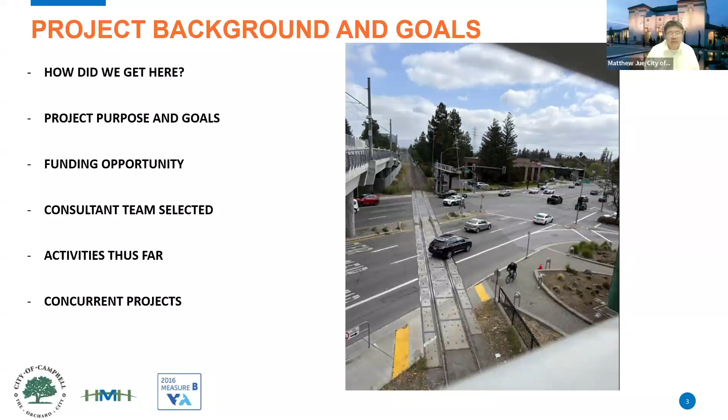So with that, we will hand things over to HMH, who will share their findings thus far. Thank you, Matthew. Hi, I am Jon Cacciotti, a principal with HMH Engineers, and I have been leading the consultant effort studying alternatives for the project footprint and configuration.

The project is located at Hamilton Avenue and State Route 17. The yellow circle there is the limits of the study area. As Matthew mentioned, there's a broader corridor that will have some additional information at the end of the study, reaching from Bascom Avenue to the east of the screen here. But again, our project is focused at the interchange, crossing the high stress movements with Caltrans and the state highway system. Also nearby is the old Fry's Electronics building in the southwest quadrant of the project area, and the VTA light rail station in the southeast quadrant.

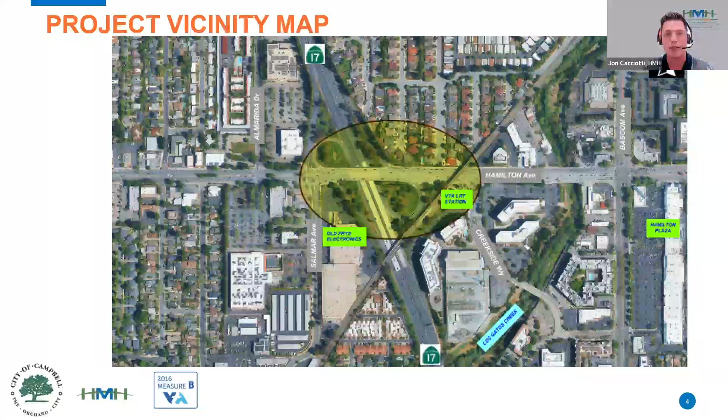Existing conditions out there are outdated and do not meet current best practices for multimodal accommodations, including bicycle and pedestrian stress levels. The project is seeking to improve these existing conditions by reconfiguring the interchange and potentially realigning the bicycle and pedestrian route through the project area to improve pedestrian comfort and lower stress levels for all ages and abilities across the project corridor. As you can see, existing conditions have yield-control crossings at our on and off ramps, or at the loop on-ramp specifically, which can be very stressful as a pedestrian tries to navigate whether or not a vehicle will yield as they use those crosswalks. Similarly, crosswalks are narrow and in some cases outdated or inconsistent in their definition through the corridor.

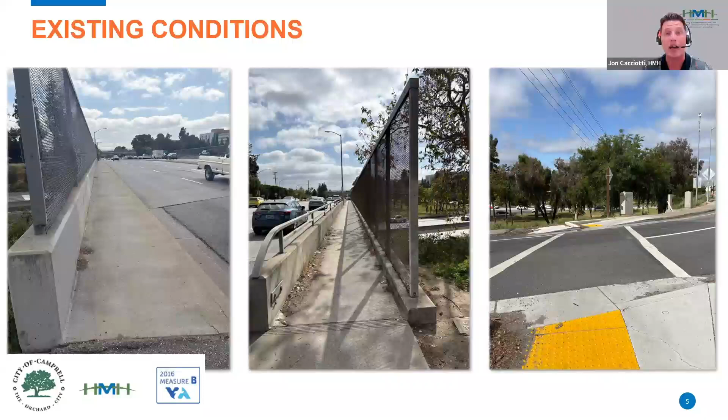I'd like to recap some activities that have occurred over the life of the project, including engagement with the public and other stakeholders. Earlier this year, we engaged in a community survey, of which we received over 400 responses, and we held a similar in-person public outreach meeting to describe the project. At that time, no alternatives were developed, and we were working with a blank canvas, trying to identify how the community and local residents would like to see a solution and how they would prioritize the trade-offs of these treatments. One thing we really sought out was various experience levels of our bicycle and pedestrian users, those that may be confident and use roadway facilities, as well as those that may be inexperienced or uncomfortable on the existing facilities. We also sought input from residents throughout the city and neighboring communities to ensure that we have a good representation.

On the right, there is a bar graph of the prioritizations that we sought from the public. The question we asked was, what aspects of a bicycle and pedestrian facility do you consider most important? Those were ranked on a scale of 0 to 10, 10 being the most important.

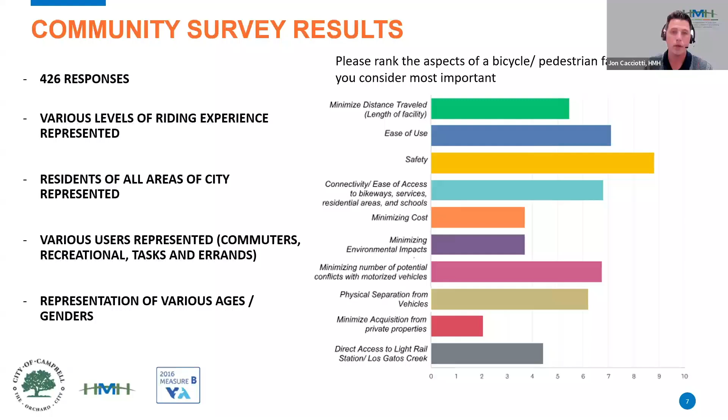We also engaged our stakeholder partners, including the City of Campbell's Bicycle and Pedestrian Advisory Committee, VTA, Caltrans, and the City of San Jose. We presented the alternatives for viability, fatal flaws, any issues that they may have, as well as compatibility with other ongoing projects, either in the City of Campbell or elsewhere through the City of San Jose and the region. Each of the project partners here has reviewed our project plans and has demonstrated concurrence with and support for the project as a whole.

For the alternatives developed, we evaluated them on a number of metrics, similar to what was described in the stakeholder outreach and the survey performed earlier this year. Key areas that were evaluated were the user experience - how does it feel to be on this facility, including number of conflict points, how separated you are from vehicles, and the delay associated with signalized crossings of different movements for bicycles and pedestrians.

We looked at impacts to traffic operations, ensuring that our project alternatives, if they do have an impact to traffic operations, which are heavily congested in this corridor, that we understand those trade-offs. Environmental, both visual and biology - potential impact to trees or native species, and the impacts of our project alternative.

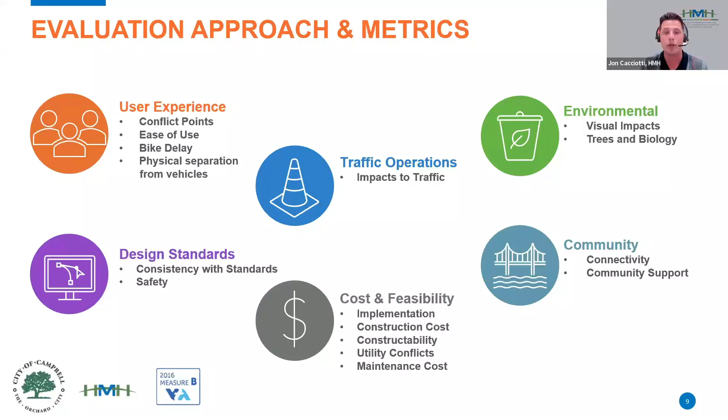I'm going to briefly introduce each of the 4 alternatives that were studied, as well as some major pros and cons that help to elevate - either increase or decrease - how these alternatives were scored as we looked at them in comparison to each other.

The first route is the southern route. In this exhibit, State Route 17 is running top to bottom on your screen, and Hamilton Avenue is running left to right. North is up.

In this alternative, bicycles and pedestrians would be routed off of Hamilton Avenue to the south, along roughly 500 feet south of Hamilton Avenue, over both the southbound diagonal on-ramp from Hamilton to State Route 17, as well as the highway itself over State Route 17.

The alignment would then tuck into a landscaped area between the northbound loop on-ramp and the VTA light rail retaining wall that runs diagonal through the project screen. The alternative would continue to the east and cross under the existing light rail structure at grade, in roughly the same location as the existing sidewalk.

The project would terminate on both the east and west intersections as shown here, with upgraded facilities at those intersections to facilitate bicycle and pedestrian ingress/egress. In the westbound direction, we would also add a bike lane that is not present currently and enhance it with green striping and other markings to delineate that facility for use by westbound cyclists who did not want to use the Class 1 grade-separated facility to the south.

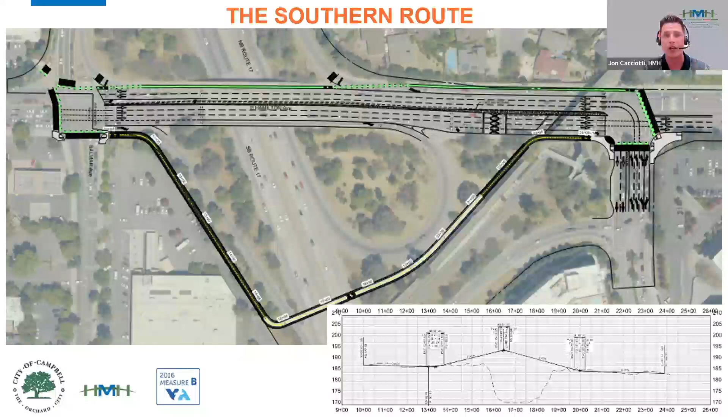Major pros of this alternative is that it reduces some of that out of direction travel that we talked about with the southern route. It is the most direct, particularly with a convenient staircase in the loop for pedestrians, but it does have some drawbacks. It does have a more significant vertical change in profile as opposed to the southern route, and most notably, it retains an at-grade crossing of the southbound diagonal on-ramp.

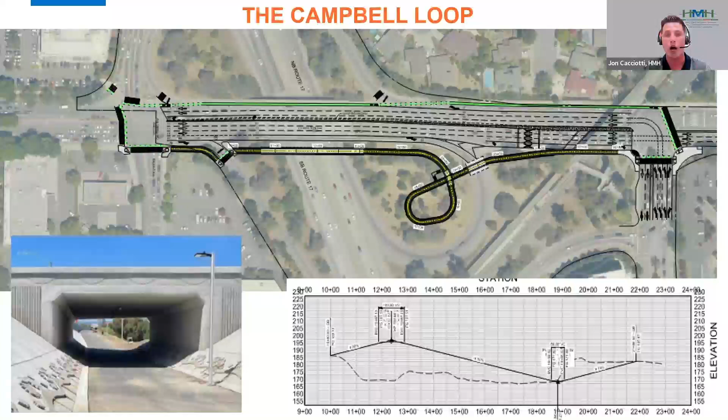An image of the undercrossing is shown in the bottom left corner of the screen. This is an example of what that crossing underneath the northbound loop on-ramp could look like, opening up that structure so that it has passage of light and air and the appearance of a safe facility that you can see through and understand the obstacles you may be navigating on a bike or as a pedestrian.

The third alternative is the straight shot. It would again remain on the south side of Hamilton Avenue. This alternative would have at-grade crossings from left to right at the southbound diagonal on-ramp. There would be a new structure over State Route 17, similar to the alternative I just described. Then instead of looping within the loop on the northbound loop on-ramp, it would cross at grade across the northbound loop on-ramp and then continue at grade on the south side of Hamilton Avenue.

Major pros of this alternative is it has fewer structures than other peers, and in that regard, it is more cost effective, but it does retain at-grade crossings of both loop ramps, which can introduce conflicts and stress levels for those all ages and abilities riders that we are trying to accommodate. Similar to each of the alternatives described so far, enhanced bike facilities would be added in the westbound direction of Hamilton Avenue and intersection improvements as shown previously.

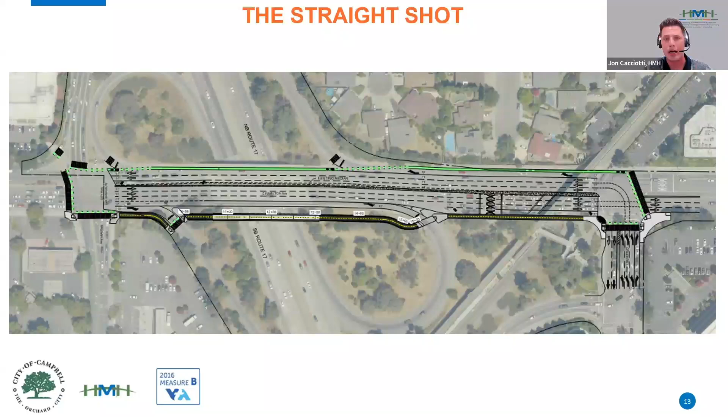Finally, our fourth alternative is the minimalist. In this configuration, no new structures would be constructed. We would realign the lanes existing on Hamilton Avenue and replace the existing southern sidewalk with a Class 1 facility that would be shared use by both bicycles and pedestrians. At-grade crossings would exist at both the southbound on-ramp and northbound loop on-ramp.

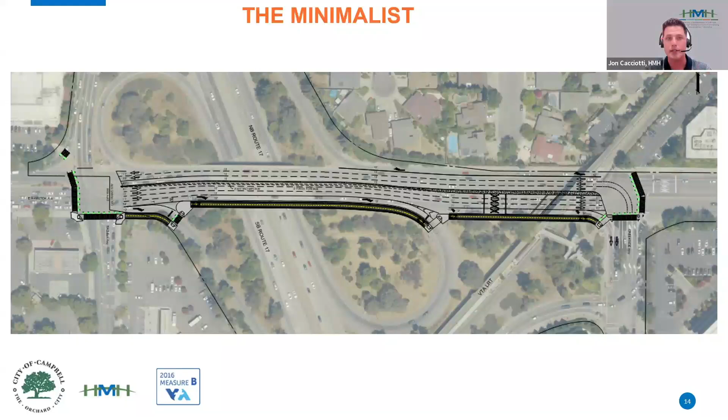For this alternative to fit within the existing structure, we would not be able to include westbound bike lane enhancements as shown on previous alternatives. So westbound cyclists could either cross at the intersections entering and exiting the project area to use the new Class 1 facility, or occupy a traveled lane, both of which are compromises to the ultimate success and delivery of the project purpose.

Recapping briefly on the four alternatives, starting with alternative 1, the southern route, and alternative 2, the Campbell loop. Those two really seem to be the most promising as we worked through our evaluation and met with stakeholders, because of their grade-separated facilities. They are generally more expensive than the straight shot and the minimalist, but as we saw earlier from input from public comment, cost was not a driving factor; safety and physical separation for cyclists was.

For those reasons, both the straight shot and the minimalist are recommended for discontinuation from any further study. Now, the southern route and the Campbell loop are both promising and have trade-offs. The southern route does have some complexities with the interface between VTA and Caltrans for future maintenance and long-term operations of State Route 17, although they have demonstrated that they would be supportive of that alternative.

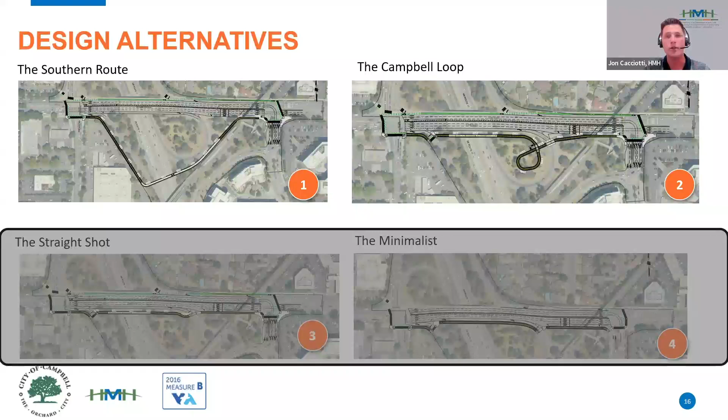Similarly, the Campbell loop retains an at-grade crossing of the southbound diagonal on-ramp, but is a more cost-effective solution. So those are the two front runners at this point of our evaluation criteria.

So real quick, the southern route and the Campbell loop are alternatives that we are interested in additional input from both the community and from City Council.

The pros of the southern route is it's a flatter profile and it eliminates all conflicts with those ramp movements, but it is longer end to end and it does have some construction challenges adjacent to the light rail structure that's owned and maintained by VTA.

Similarly, the Campbell loop is shorter in total length traveled, and it does eliminate conflicts with that northbound loop on-ramp, but it does have steeper grades, which may be a larger challenge to either cyclists or pedestrians, as well as it retains an at-grade crossing with the southbound on-ramp.

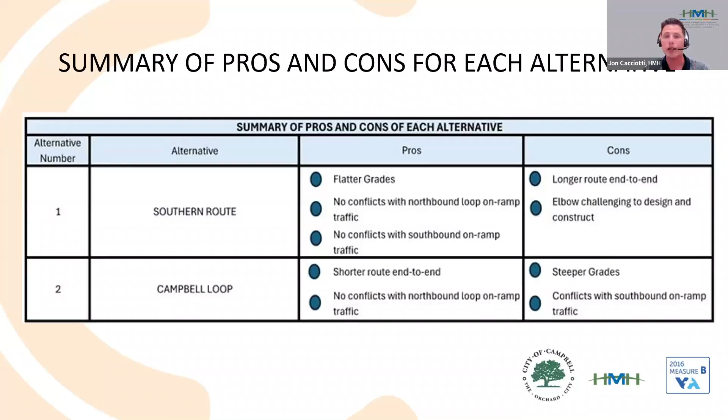With that, I will pass it to John Alciati, who will talk about some of the structures crossing over State Route 17. Thank you, John. My name is John Alciati. I'm with Biggs Cardosa Associates, and we're providing the structure support on this project.

As John described earlier with the roadway alignments, those will require a bridge structure to cross Highway 17, either closer to the existing overcrossing or closer to the light rail and UPRR tracks. Those are shown in green fill on this view.

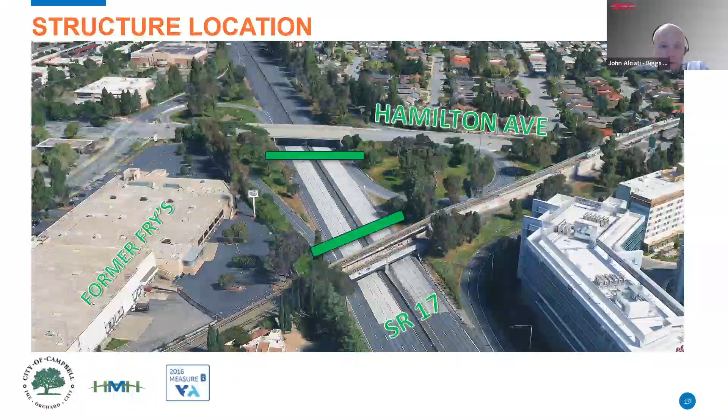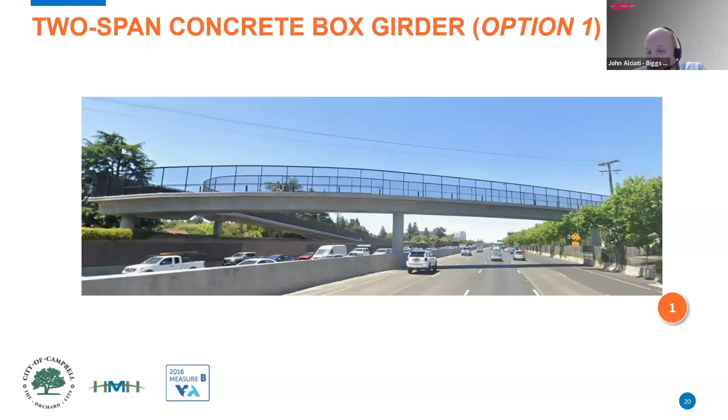We looked at multiple structure types to carry people across Highway 17. The first option was a 2-span concrete box girder option, which is your kind of standard Caltrans structure option. It does have a column in the middle of Highway 17. This is the most cost-effective and least maintenance for the city, and any aesthetic opportunities for this structure type would be texture finishes on the concrete surfaces around the column or the sides of the bridge, and railing aesthetics can be added as well.

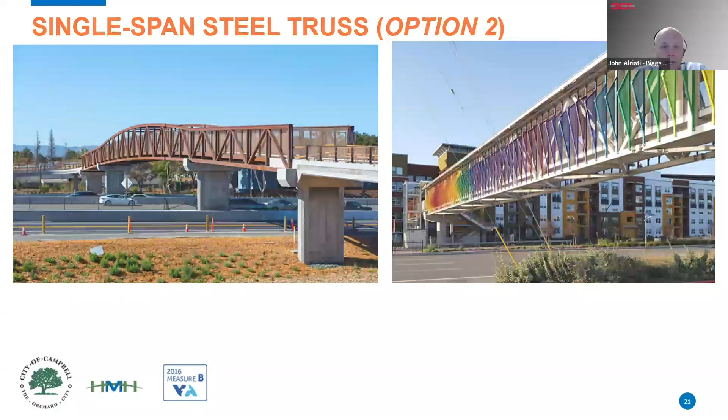The last option we looked at was a steel network tied arch option. This is an arch structure with cables that come down to the deck level and support the deck as it clear spans the freeway, so no columns in the median. This is the most expensive structure type of the three, and it can be painted to provide aesthetic appeal. This will also have increased maintenance compared to the other two options.

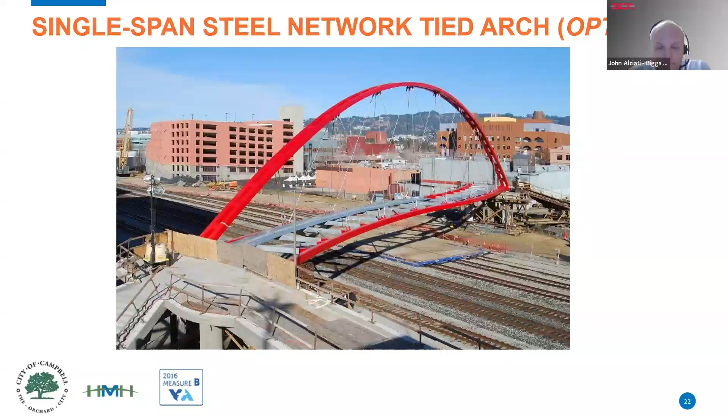In summary, some of the pros and cons for the 2-span concrete box girder option: least expensive, a standard Caltrans structure type, less maintenance compared to the other options, but it does require a column in the freeway and falsework to construct the bridge that will need to be placed temporarily over the freeway.

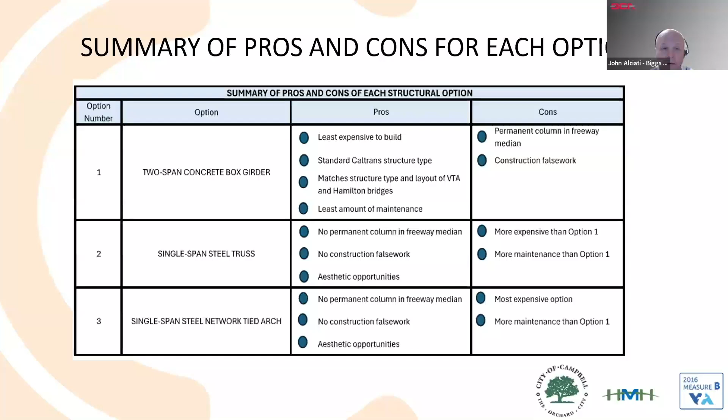The single span steel truss and steel network tied arch options clear span the freeway, no columns in the median. They have different aesthetic opportunities, but they will be more expensive and require more maintenance compared to the concrete box girder option. And with that, I'll pass it over to Regina.

John? All right, so now we'll talk about next steps.

This feasibility study will be finalized in December of this year, after which it will be presented to City Council in February 2026. The next steps after that are, if council authorizes and the funding becomes available, this project will move into a design phase and then a construction phase.